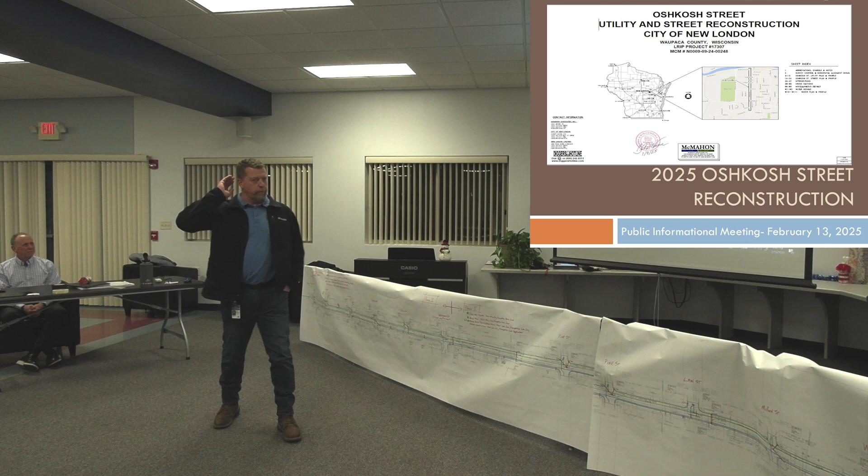Just see what happens. Okay, for the sake of time, it being 6:03, I'll start the meeting.

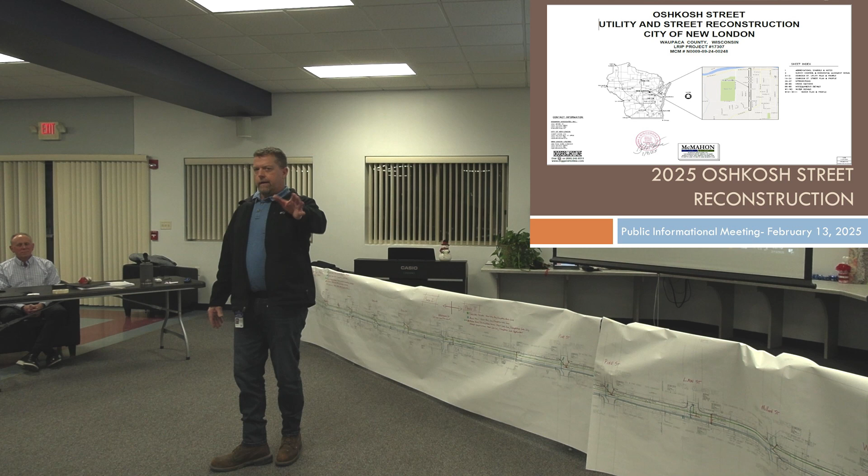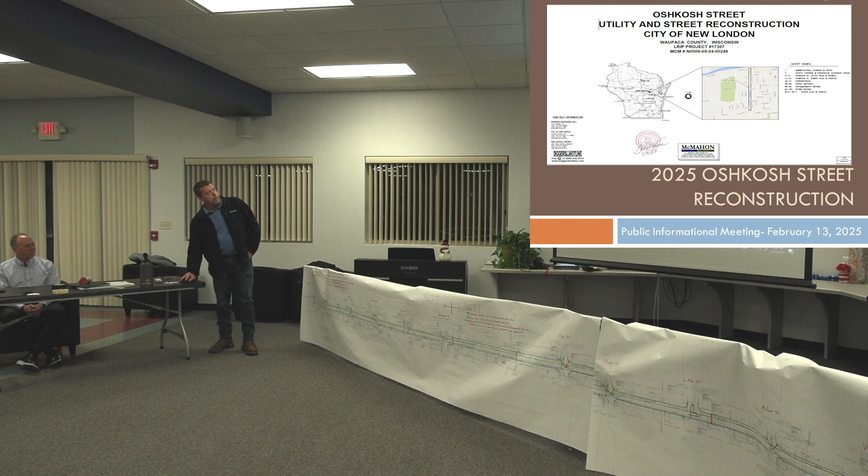All right, we'll start with introductions. I am Robert Garski, Director of Public Works for New London. I'm Brad Warner with McMahon, the project engineer, the consulting engineer the city's hired. I'm Mike Finch, water supervisor with New London Utilities, and we're doing this project jointly with the city. I'm John Hess, council president and District 2 alderman. Robert himself is district alderman.

So on the agenda today, we'll go over project summary, project timeline, detour routes and access to properties during construction, sanitary sewer lateral replacement, assessments and public hearing, water lateral replacements and assessments, mini storm and sump pumps, service walks, trees, garbage, and what's happening with the reconstruction street-wise.

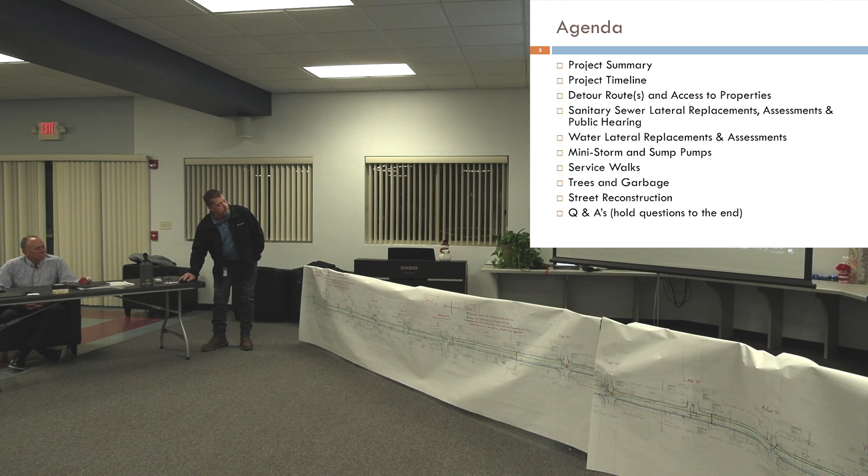So, project summary. We're replacing the sanitary main on Oshkosh Street from Wolf River Avenue to Pershing Street. The water main will be replaced from Wolf River to Jennings. The southern half has already been replaced. They have a little work to do up by Robin, but that's what they have for main.

Replacement of sanitary sewer laterals that are not to code, and replacement of water service laterals that are lead. There's also reconstruction of the storm sewer inlets, leads, and manhole structures. There will be an addition of a mini storm going in to pick up a lot of the sump pumps we have, especially on the southern end. That one will be more behind the curb versus a direct tap into the storm main.

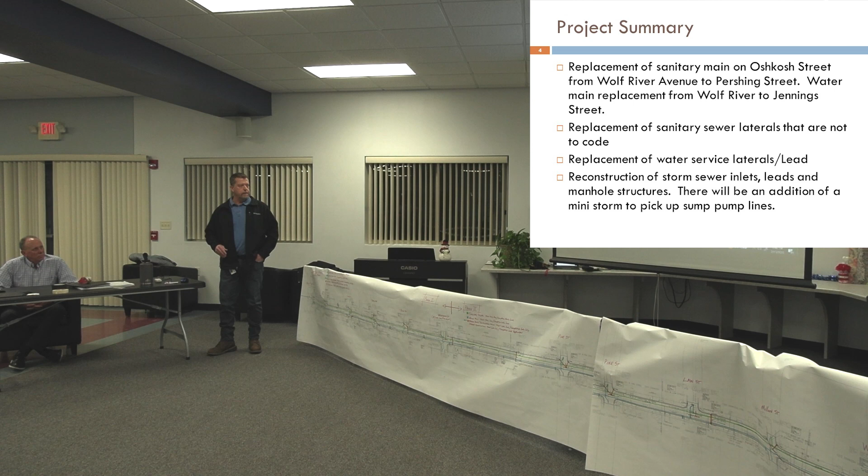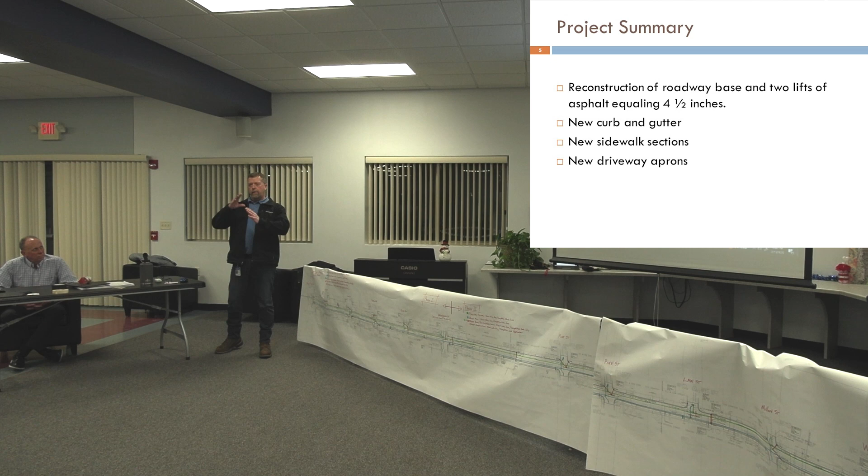There's also reconstruction of the road base and two lifts of asphalt equaling 4.5 inches upon completion, new curb and gutter, and new sidewalk sections. That doesn't mean new sidewalk is going in, only where there's sidewalk now will there be sidewalk replacement. There's no additional sidewalk being added. That's one that kind of got mixed up and I had a lot of calls on, so no additional sidewalk, just fixing what is out there now. There's also new driveway aprons for every driveway on Oshkosh Street.

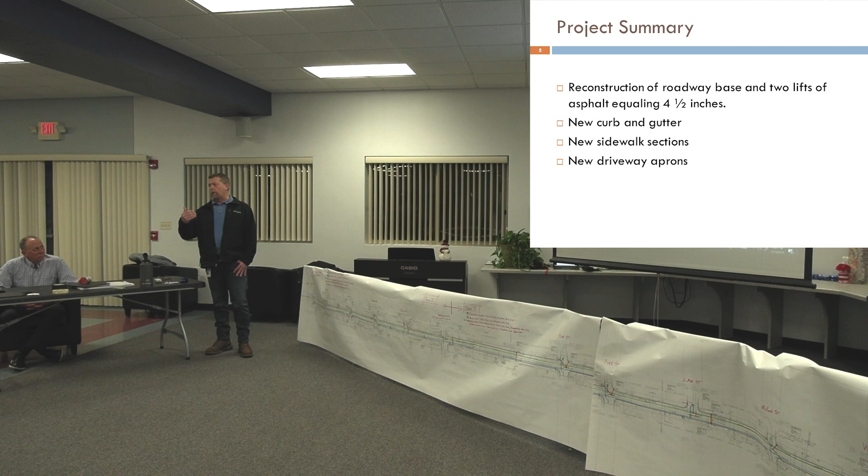Their projected timeline is starting anywhere from the beginning to middle of March. That's the schedule they've submitted right now, though of course weather can really play a factor in that. So they'll start with the sanitary main, bringing it all the way up to and stopping just short of Washington Street. Then they'll come back and do the water main, starting at Wolf River and carrying it up to that same stop point just before Washington Street.

We want to leave Washington open until school is out, that is the goal. So that's expected to go through probably mid-April. Then when they switch over to laterals, that will run probably until the first week of May timeframe.

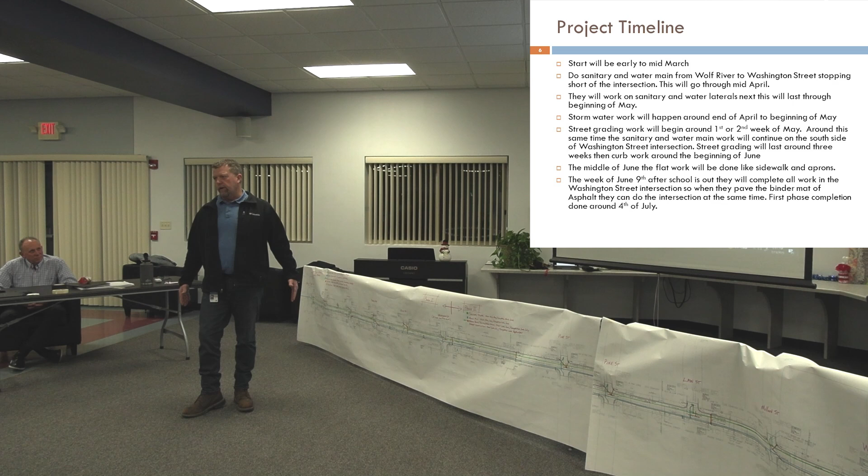This construction isn't a full blown up area, so it won't be like the whole road is inaccessible while they're doing that main work. It's more of staying in one trench, either cutting to define their dig area or milling that area to try to keep that contained and not have the street blowing up to where people are having trouble getting to their driveways.

So during that time, they'll be running that while this street work is being done down on this side in phase 1. They're hoping that after school, they can come back, do all the work in Washington, complete all the utility and stormwater, and that way they can continue with their curb and gutter and get that pretty much set and ready for asphalt.

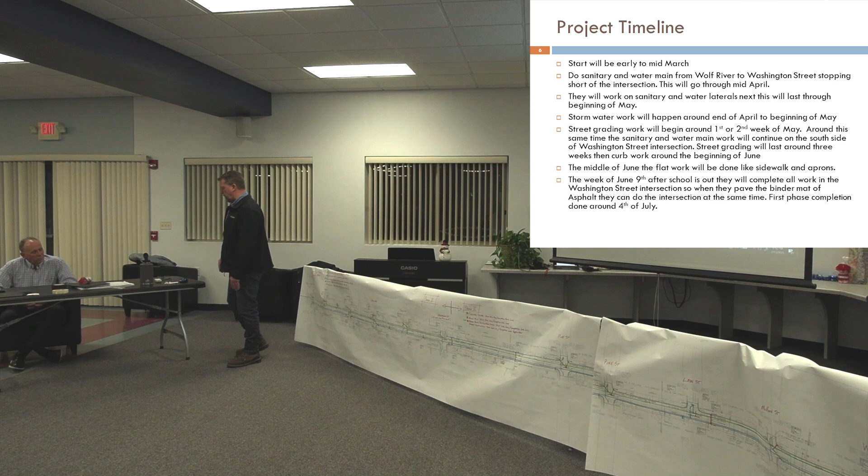So when they start with binder down here, they'll be able to pave that intersection in. So this phase 1, we're hoping will be complete-ish by 4th of July, around that time frame, according to their schedule, weather dependent.

Where are we at? Oh yeah, July. So they'll be doing, as soon as they're done running those 2 mains, they'll have a lateral crew in working. At the same time, they'll be working on the stormwater.

That's where this area, hopefully by then, phase 1 is done. We're on to phase 2. That's where you'll start to see these intersections blowing up like you saw in the first stage. So all the work will happen just like it did in the first phase. Hoping to have driveways and aprons worked on through August. Paving the second phase by September, middle of September.

If everything goes well and as planned and scheduled, which hardly ever happens with road construction, but if it does, we're looking at the beginning of October for completion of the project.

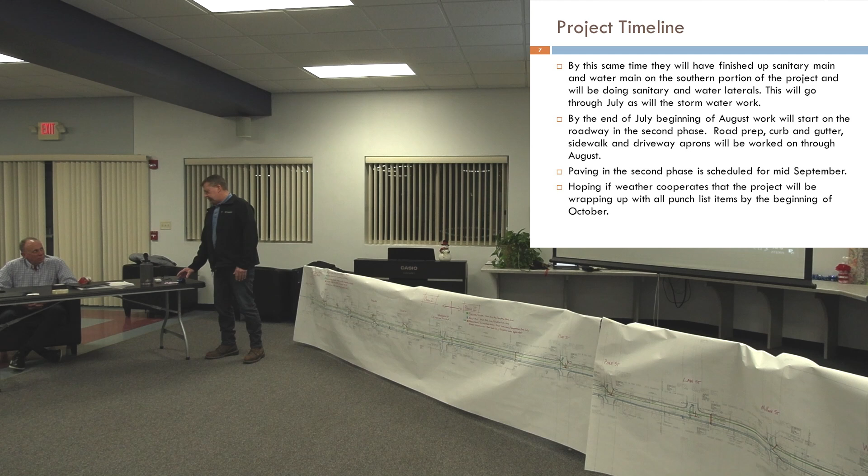Detours for the project: Oshkosh will be barricaded and signed to be closed to through traffic. This is for all your daily people that use that as a cut through to get through. It will be closed to through traffic. The main detour will be around from Pershing to Wyman to Wolf River, and reverse order for southbound traffic.

For residents, we're asking that, especially during any of that construction phase, you're utilizing the first side street as ingress and egress to your driveway, not using it as a travel lane. I realize some are close to the end or whatever, you have a block to go.

It's not like a police thing, it's just asking, because once the street starts getting worked up, there's a chance of dealing with dust and everything else if we have a dry year. So just trying to keep that in check too.

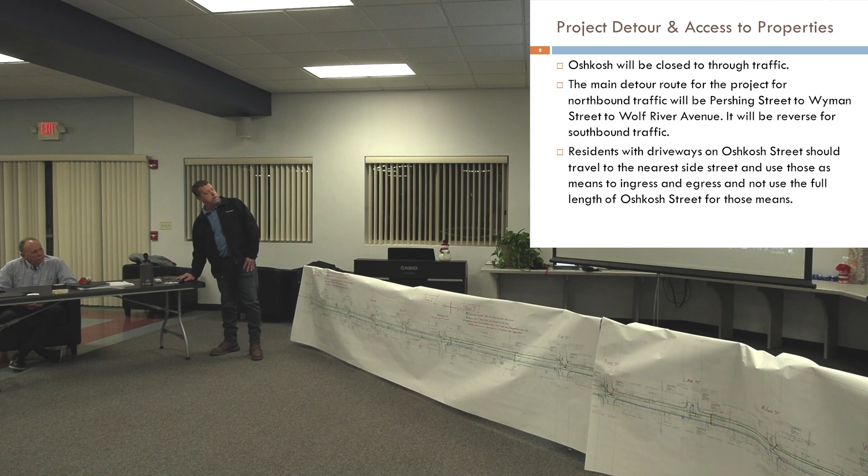Assessments. So for this project, there will be no assessments for any sidewalk work that is done, any curb and gutter that is placed, which is all brand new through the whole project. Sanitary and water main, there is no assessment for the mains. No assessment for the storm main, the inlets, the inlet leads.

No assessment for any mini storm that is put into the right-of-way line. Any of the roadway components, any of the fabric, the geogrid, the gravel, the asphalt, there is no assessment for that. And the driveway aprons - everyone will have a new concrete driveway apron that will not be assessed.

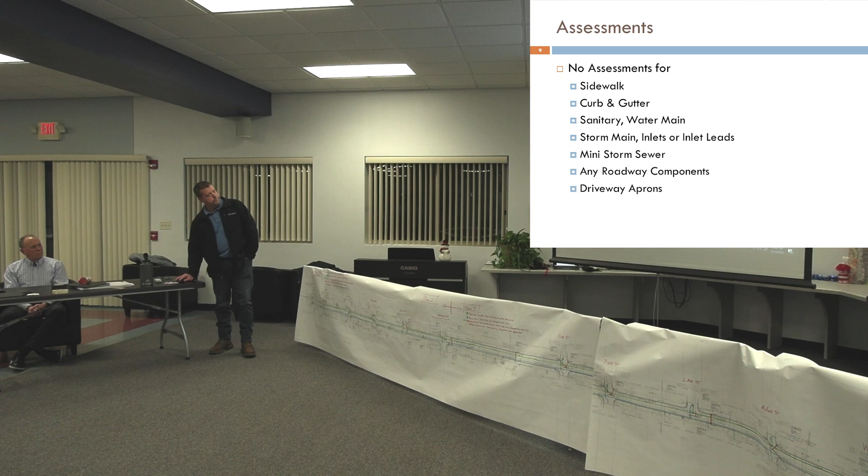Sanitary sewer laterals. During this project, the sanitary sewer main will be replaced on Oshkosh Street from Wolf River Avenue to Pershing Street. Per city ordinance 11.02m(1), all laterals connected to a new main must be compliant with current building codes or it must be replaced.

All of the sanitary sewer laterals along Oshkosh Street were televised, showing the condition of your lateral. Non-PVC laterals showed signs of cracking, joint failure, root intrusion, and water infiltration.

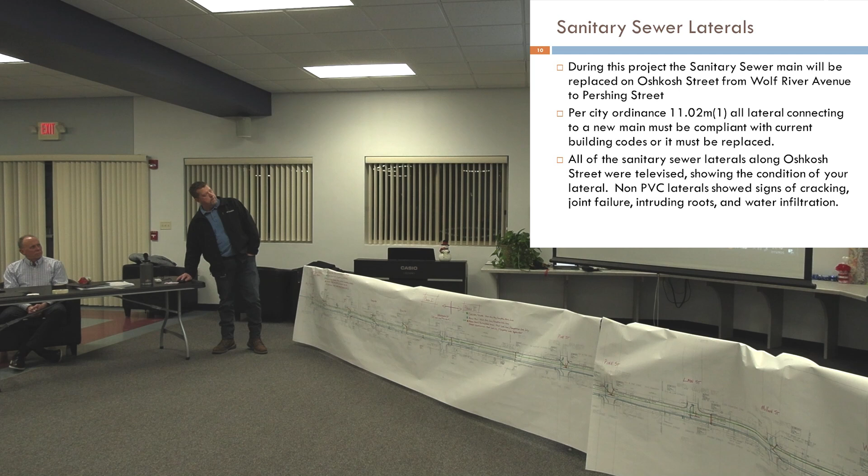Other reasons for this replacement, besides municipal code, is these sanitary laterals, once sealed, will keep all of this clean groundwater from entering the sanitary system and having to go through the treatment process, which every day gets more and more expensive, especially with the chemicals we have to use down at the plant.

It's also the fact that we're getting a $2 million grant to do all this road work, all this new curb and gutter, everything. We'd hate to have lateral issues or any type of utility issues down the road and have to cut up a brand new street that we're hoping lasts a very long time.

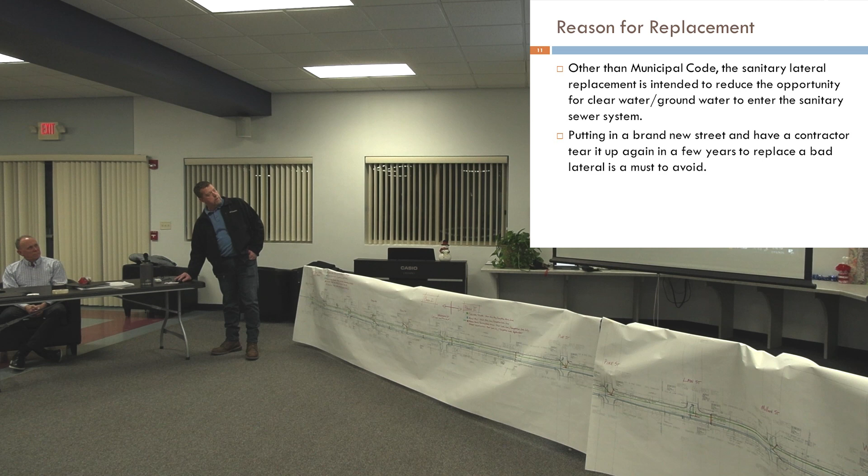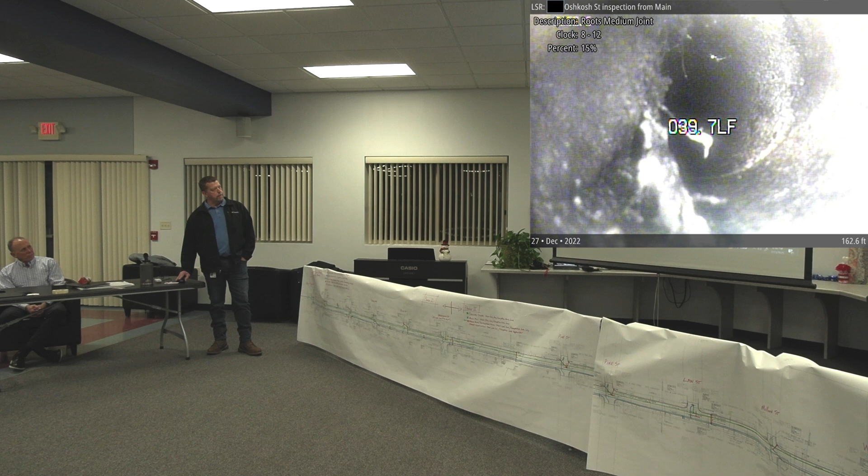Here are some clips that I took from some of the lateral inspections. You can see a leaking lateral and how the incrustations start forming from water intrusion. This is natural mineral deposits that happen over a long period of time from this clean water coming in. Here you're looking at a blockage of roots, a larger root coming in. This is on a concrete pipe.

So for sanitary sewer laterals, the city will be changing out all laterals in the road right-of-way that are not to code. Property owners will be assessed this cost. If we find that the lateral on your private property is compliant with current building codes, PVC pipe for example, no replacement will be needed. If the lateral is not compliant—clay, cracked, concrete pipe, any of that—it will need to be replaced.

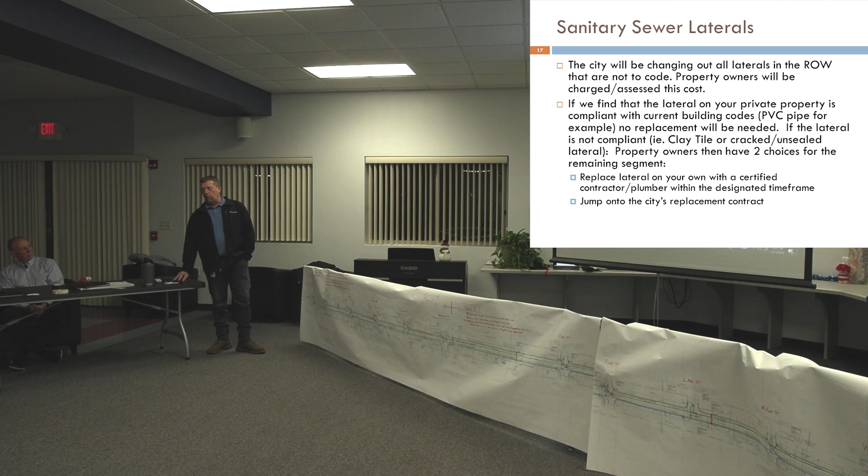If you choose to use the city contractor for the replacement of your lateral from your property line to your house, that cost, plus the cost of the right-of-way portion, will be charged to you. You can either pay that cost up front or pay the entire charge over time as an assessment.

10 years at 1%. The 10-year plan is proposed on the final assessment resolution. The final assessment resolution is a document that has to go through the Board of Public Works first, which it did, and now it will go to common council on the 19th.

I cannot say this is approved until the common council actually approves it. From past practice, this has never been turned down and it has always been offered, but I cannot tell you right now it's a guarantee until they do that, if they do that, on the 19th.

If you plan on hiring somebody else, that is the portion where I said you'd have to line it up, and you'd have that 60 days to make that repair to your private portion.

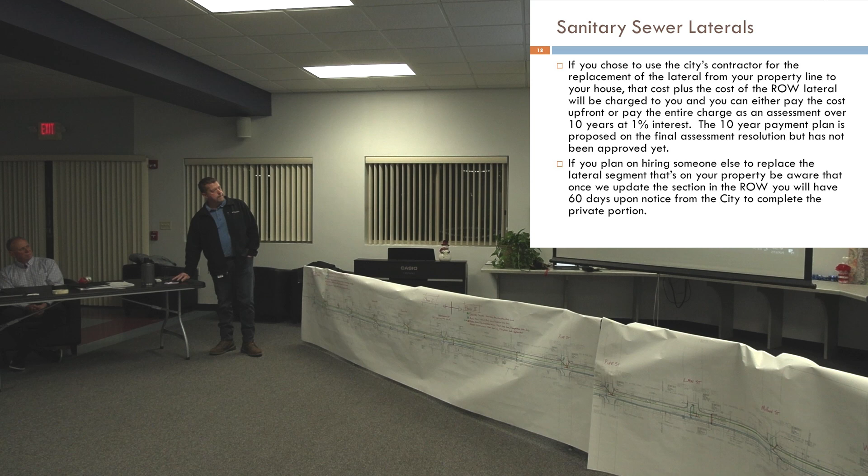Here's an illustration of the sanitary main, and the sanitary lateral that is within the right-of-way. If you have sidewalk, you can pretty much state that the back of sidewalk is close to the right-of-way line. If you do not have sidewalk, it is generally anywhere from 11 to 13 feet from back of curb in towards the property. Segment 2 would be from that right-of-way line to your house.

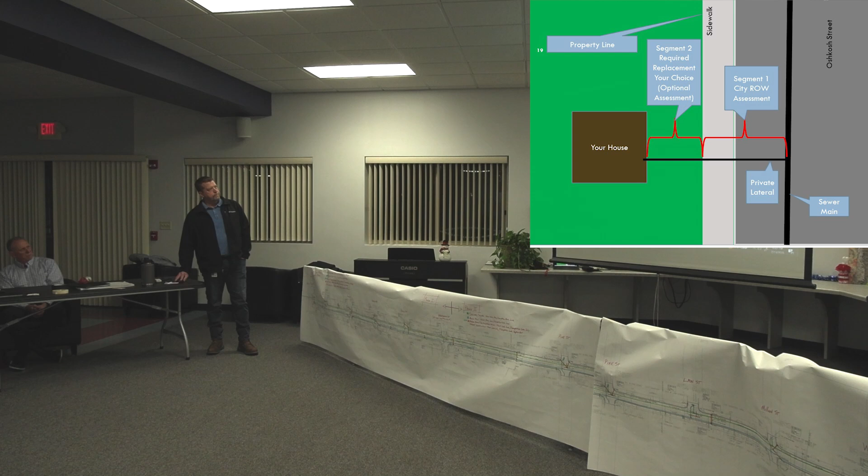Engineer's report. We have a bid price from the contractor, so we know we have an estimated cost only. Page 4 talks about the right-of-way lateral versus the private portion of the lateral, kind of like I illustrated in that last slide.

The engineer's report on page 5 talks about right-of-way costs. The estimated sanitary lateral assessment for lateral work in the city right-of-way or easement. The cost includes all construction, administrative, legal, engineering, and contingency costs required to provide a new lateral to the right-of-way line or easement line in conformance with the City of New London standards. The cost shown is an estimate for a new 4-inch lateral excavated to the right-of-way. The final assessment shall be equal to or lower than the amount shown in bold: 6,418.

The reason why we did the open trench method in the right-of-way is because this is the most expensive form of getting your lateral replaced. And you're saying, what? Why are you doing the most expensive way?

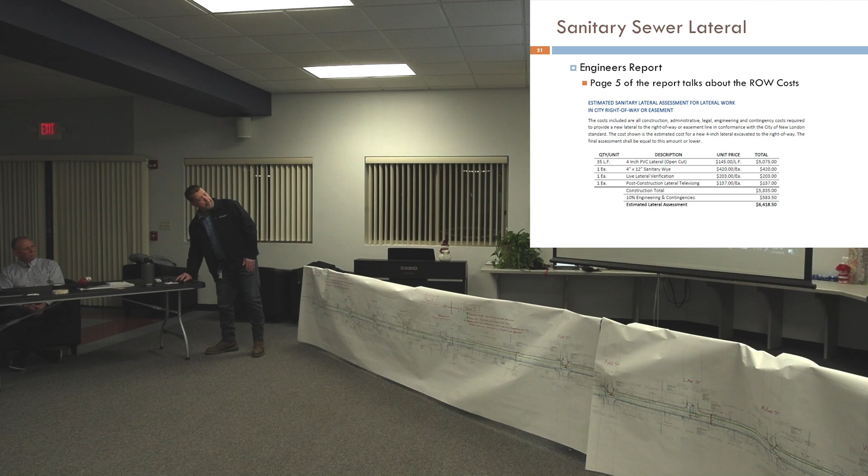Private side — so there are three methods. We have the lining method. This would be from your right-of-way line into your house. There's a setup charge for that lining.

The 4-inch cleanout is placed at the right-of-way so they can go in with their equipment, clean your existing lateral, and then bring in the liner through that same cleanout. They expand it, it cures in place, and there's very little work to be done inside. That cost is estimated for a 30-foot piece, and everybody's private side varies based on the setback of your home from the right-of-way line. Over a 30-foot run it's $3,265, based on bid prices we got from the contractor.

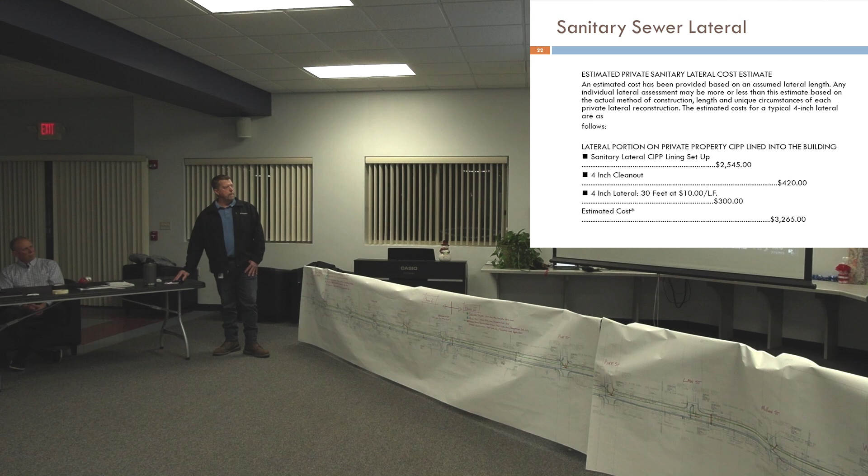There's also pipe bursting. With pipe bursting, they actually pull a line through your existing line. They have to make a cut in your basement floor, or if you have a crawl space with access to it, there wouldn't be any cutting there. They bring a cable through and are able to pull that new line all the way into your basement and make the connections. Everything listed there is pretty much everything they need to do to complete the job for a 30-foot run, and that price came in at $3,898.

There's also the excavating method. This is where they trench right up to your house from the right-of-way line. In some instances you're not able to do this, simply because some houses have the lateral going under the driveway or the apron, at an angle where you'd be taking out a lot, or there might be a front porch that would conflict with it.

And if you notice, pavement restoration beyond what we do for cutbacks to put in the road is not a covered item when it comes to excavating a lateral through a driveway. Neither is decorative curbing, landscaping, stone, or anything like that. If it's not moved by you and clear of the way, that's something you won't be able to put back, because the contractor is not going to move it aside to do the work — it's not a covered cost.

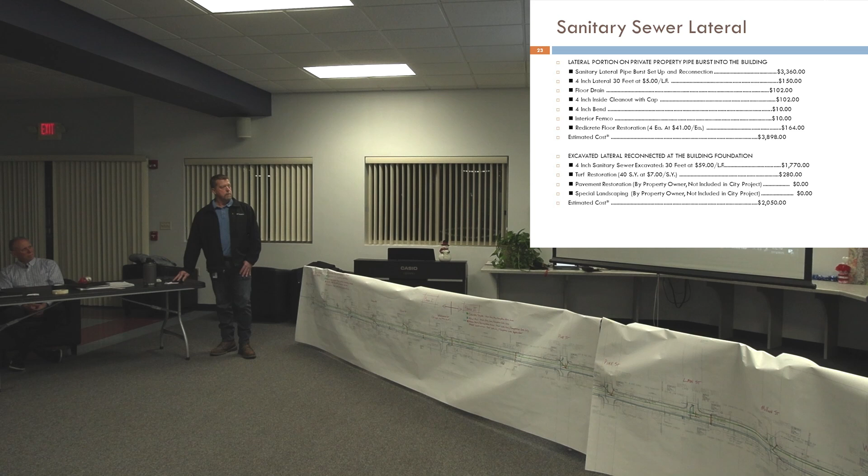So this is pretty much everything I went through, the methods. Open trench: cut, lay the pipe. You'll need to clear out anything in the way. You might lose trees if they're in the way. If you have trees in the front, cutting roots will more than likely damage those trees. Contractor will fill in the trench, but like I said, more than likely it will settle. Trenchless pipe bursting: pull a new pipe through the old one, then cut and patch the hole in your floor around the new pipe that's installed.

The lining: they add a clean out at the right of way, run a camera down to identify the length they need, clean your lateral, cut their liner to length, bring it in, blow it up, and it cures in place. It's just like an internal PVC pipe.

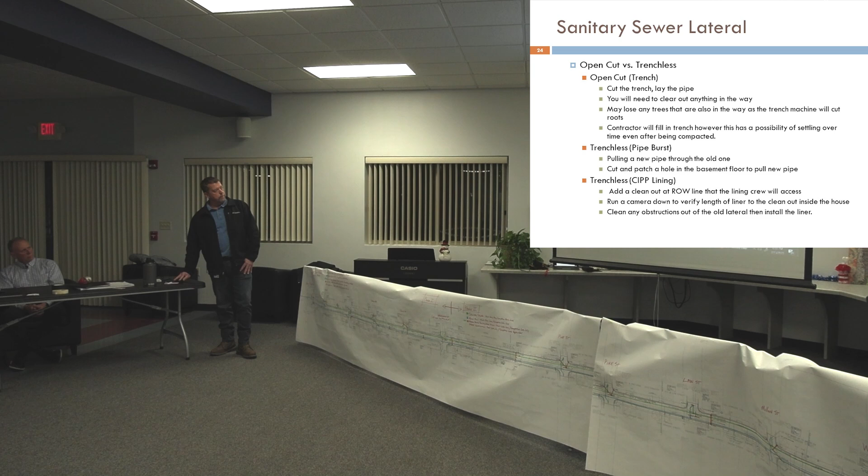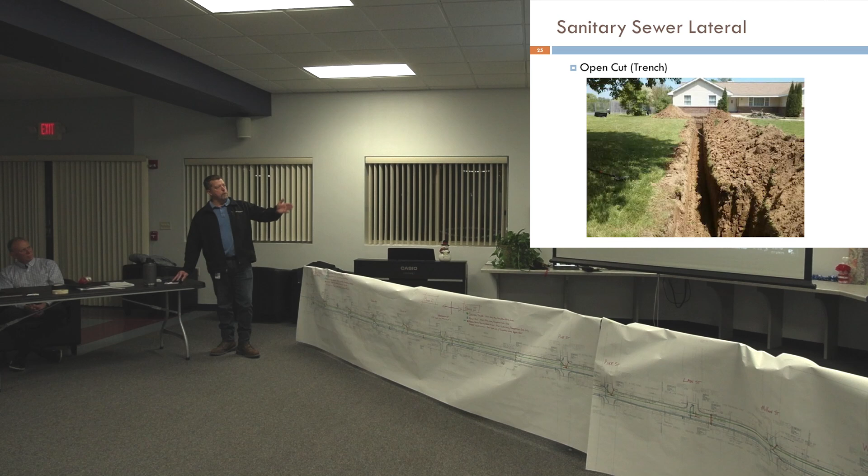Here's an example of an open trench method. This is a very clean one and not very deep, but that gives you the point of view of what you'd be looking at as far as an open trench.

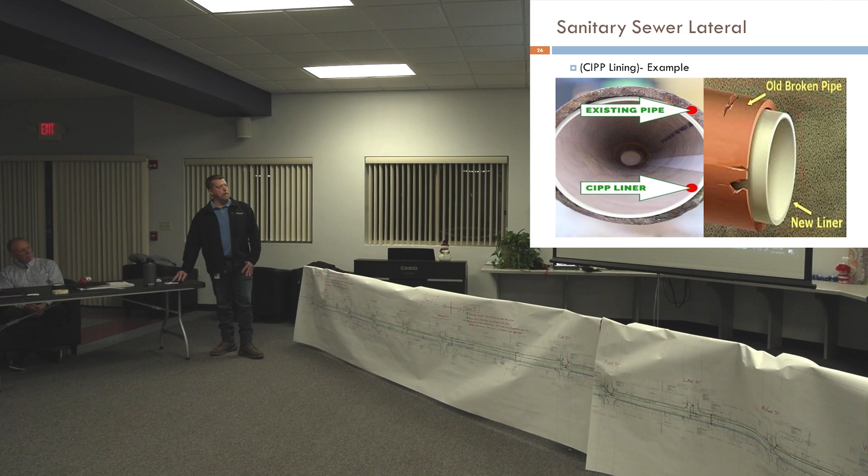Here's an example of the liner. So they bring it in, blow it up, it cures in place. It's just like a PVC pipe within your old pipe or lateral.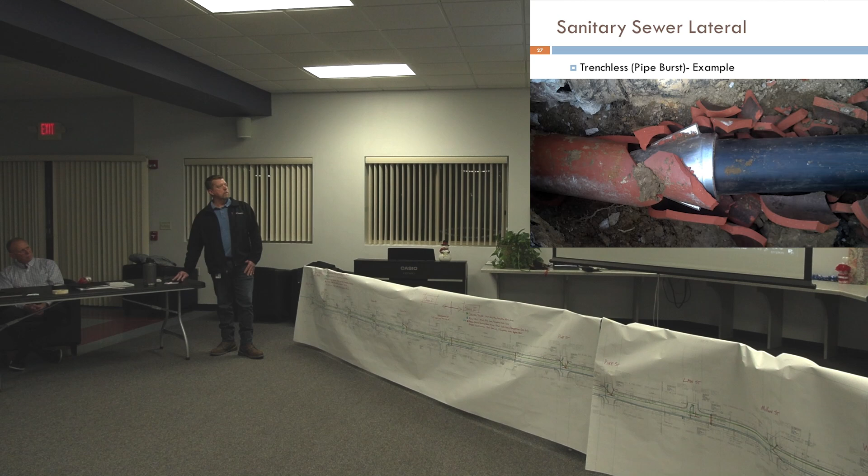If you want the city's contractor to do the work on your private side, the waiver on the back must be filled out and returned to me down at the municipal building. You come into the Public Works Department, we have a notary there, and also our clerk Nicole is a notary. So you come in, sign it, and you'll be entered into the spreadsheet noting that your lateral would be replaced by the contractor.

Once the project is complete, that summary of everything that is done - I'll actually be sending a letter to everyone that will be assessed. It'll explain the payment plan if approved and when your first payment would be due. More than likely, being that this is finishing up in October or November, don't want to jinx it, it would be due by January 31st of 2026.

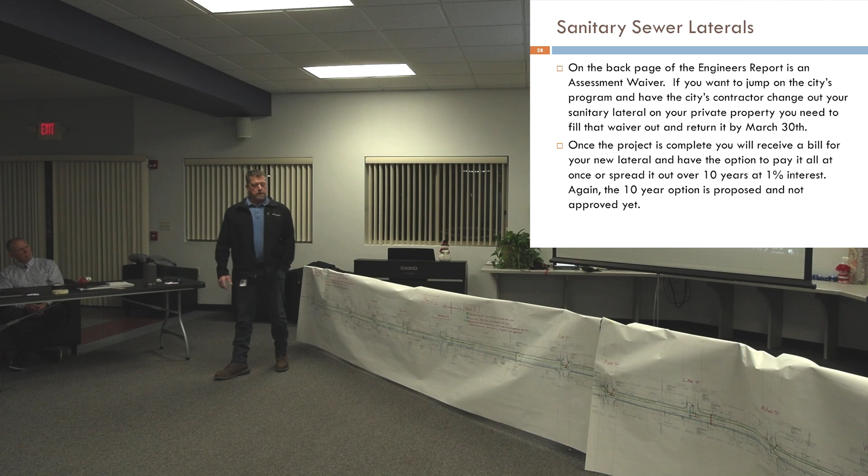It always has to go, the assessment portion by law always has to go on the first portion of the tax payment. If anybody is opposed, I cannot change anything. I am delivering you what municipal code and ordinance states for this project. You will have a chance to be heard at the public hearing on Wednesday, February 19th at 6:30 during the Common Council meeting at the Municipal Building.

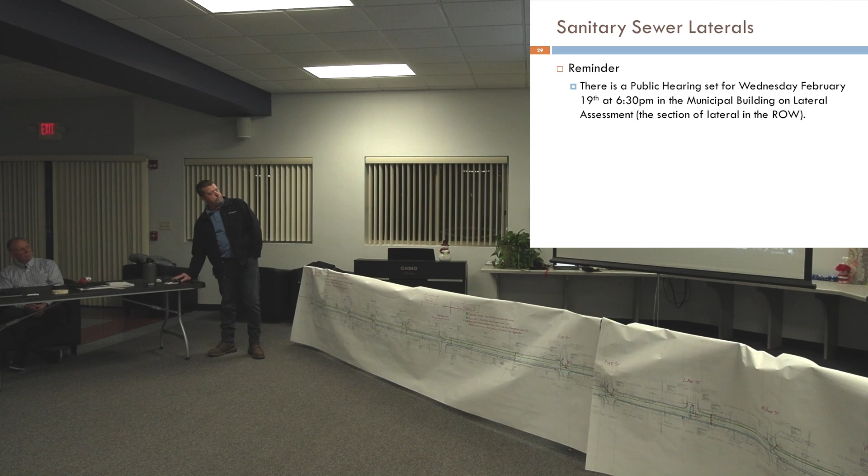Mike, do you want to touch on? Sure, I had Jason, he couldn't make it. We had trouble connecting today, so I just scrambled. I've been out of town for 2 days and super busy today, but I'm Mike with the water department. I've been here about 30 years. I've probably been in all your homes changing your meters and whatnot, but we're piggybacking with the city.

I'm not sure, do I have to have a separate form signed for the water line? No. Because the assessment goes through. So most projects we've ever done, we haven't really done jointly with the city, so we don't get the opportunity to give you an option to get financed through the city for the replacement of our laterals. You would just have to pay when those were done.

So this is a great thing for you guys because the DNR is actually making us get rid of all the lead services. I'm sure everybody's hearing this in town because it's a big thing going on. Last year we dug 60 lead services in town. This year we're digging 50 more, and we have to have them all gone within about 10 years, but we're being hugely proactive. Our city ordinance says immediately upon seeing a lead service, it has to be replaced.

So the people that we're digging up right now do not have an opportunity to get financing like you guys do, over 10 years, to get your services replaced. So that's a great thing for you guys, should you choose that option.

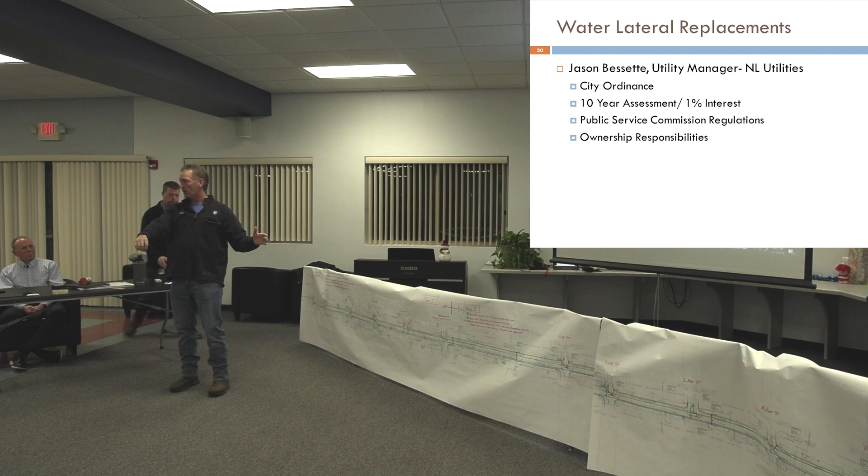Let me back up a little bit. The water line is different than the sewer line. The utility owns from the water main to the shutoff in your yard, which is called a curb stop, and you might see us turning that. There you go, all right. So we own all that.

We are replacing every service on the whole street, even up by Jennings Street where we put the new water main in a few years back. If anybody lives between Jennings and Pershing, we put a brand new water main in there, but we did not run new service laterals to the property lines because we weren't doing a joint project, and we were only tearing up as little of the road as we could, so we were able to hook onto your copper service. Now we're going to replace all those because the whole road's torn up, so why wouldn't we at least do that with the hope of not having any leaks?

So if you do have a copper service, you are allowed to keep it, and you only own from the curb stop to the house. If you have lead or galvanized, it's automatic that it has to go, but if you have a copper service, you could request to have a poly service, because that's what we'll have, which is plastic.

So I would hate to tell you that copper is 100% fail-proof, because some of this stuff is from the 1960s through currently, while we've been doing poly for about 10 or 15 years now. But just because you have a copper service doesn't mean it couldn't leak in the future.

So some of these jobs, if they're doing the pipe bursting, they're going to pull the sewer through, but they could pull a brand new water line right with that, and it's an inexpensive way to get a new service compared to digging to the house and such. So if you do want a new service no matter what, since they're pulling the sewer in, you could get a new plastic service run to your house, and obviously you have to pay for that. But then all your utilities are upgraded and your worries are pretty small of having problems in the future.

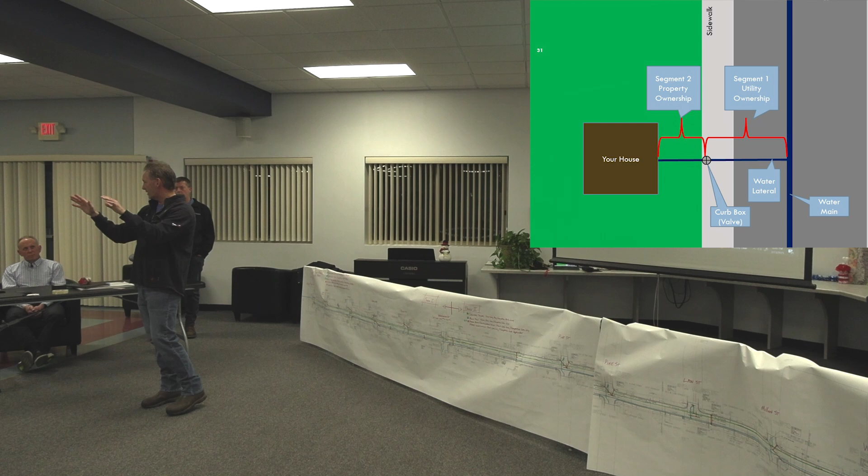So we have had copper services get pinholes in them. It's not real common. In Greenville, the whole town had problems with this, and they had leaks everywhere. It's got to do with soil conditions. We have not had any problems on Oshkosh Street, but that doesn't mean we couldn't have five in two years because they're old, and all of a sudden it starts happening. I'm just telling you that so you're aware, but you do not have to worry — generally they're pretty structurally sound. I'm not trying to scare you, just trying to let you know what your options are.

So I hope that's about all I need to cover there, sir. All right, we'll talk about questions later if you have those.

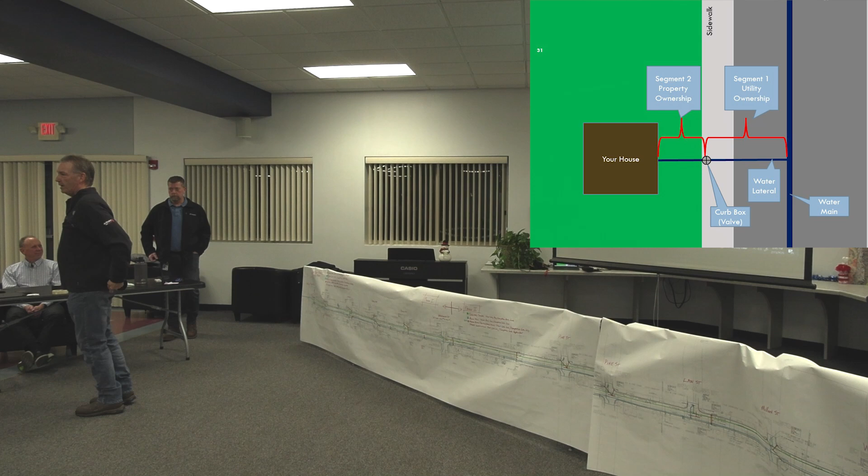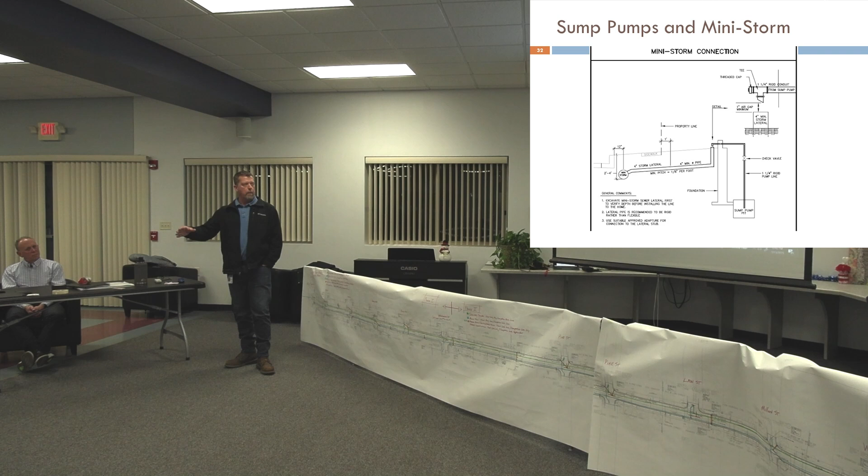So with all this work going on, homeowners may experience increased running of their sump pumps after the lateral work is complete.

What I talked about earlier about tightening up everything and keeping clear water out of the treatment plant, sometimes when you're tightening up all these lines, the groundwater that always seeped in over the years is now sitting there looking for a place to go. If a resident does not have a sump pump, they may experience water on their basement floors, as many older homes commonly had their drain tile connected directly or indirectly to their sanitary line, which is a plumbing code violation.

I'm putting this on there. I don't know through televising if any of them are this way, but there could be some in that older section set up like this. Once you have that interior portion replaced all the way out to the right-of-way line, that'll tighten up a lot of things and not allow groundwater to enter the sanitary system.

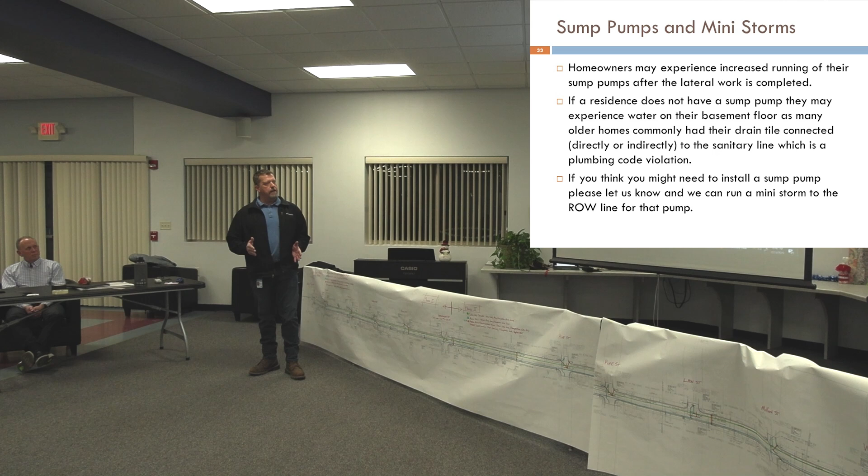If you think you might be in that situation and down the road you think you'll put in a sump pump to alleviate it, please let us know as soon as possible. We will supply a mini storm to your property line in anticipation of this sump pump being put in, because once this project is in, running water from a sump pump to the street will no longer be allowed.

You have to either run it in your front yard, or like a lot of these that are coming through the curb will be hooked up in the construction process.

Homes that have a sump pump discharge hose will receive a 4-inch diameter Schedule 40 PVC mini storm lateral that extends to the right-of-way. The typical depth of this is going to be 3 foot.

Homes that have buried sump pump lines right now that discharge through a curb head will receive a 4-inch diameter Schedule 40 storm lateral extended to the right-of-way at that 3 foot depth. It will then have a riser that will come up and meet that line at whatever depth or grade it's at right now.

If you had trouble with it freezing in the past because of how shallow it is, it would be the time to bury it down below frost line, or down at that normal frost depth, and hook up that way.

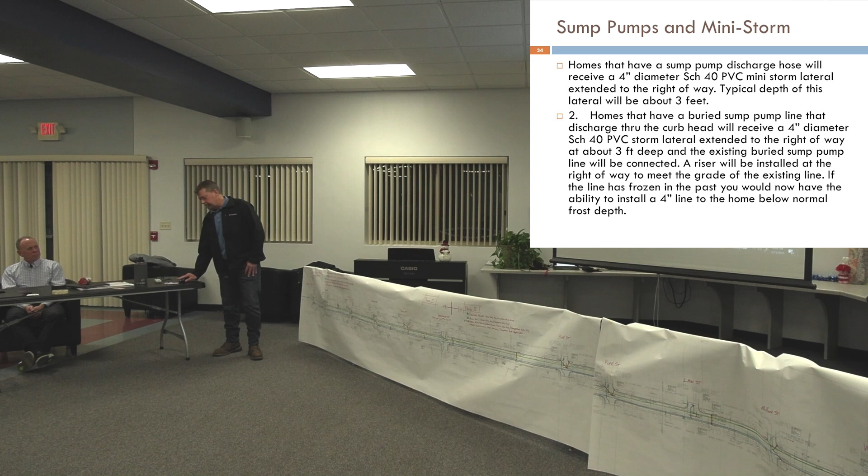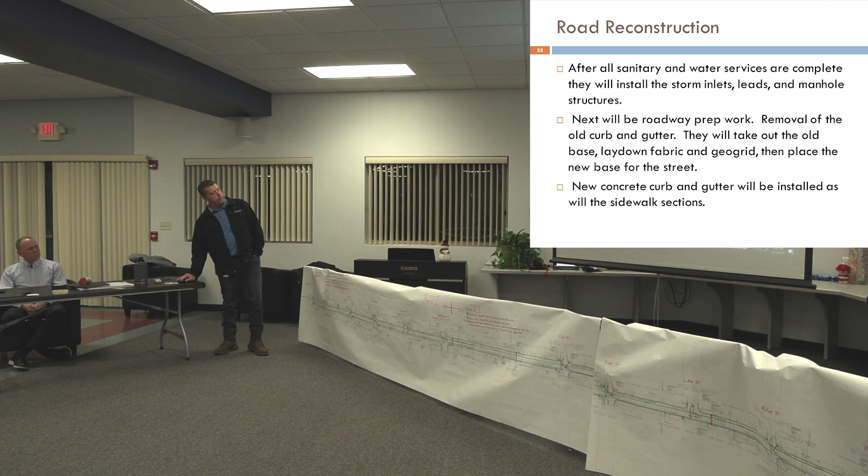Road construction. I pretty much went over a lot of this as I was talking about schedule. After all the utility work's done, storm inlets, leads, manhole structures, roadway prep, removal of old curb and gutter, they're taking out the base, laying down the fabric geogrid, placing the new base, which will be a foot thick, and then they'll install the concrete curb and gutter.

Your driveway aprons will be poured, backfilling behind the curb, topsoil will be placed, and a 2 3/4 inch asphalt binder mat will be placed down for the road surface.

Right now I am hoping that we can wait for the surface mat until 2026. Everybody's saying to me, why would you want to do that? We're going to have all these manholes ramped, you're going to have lips at the driveways of 1 3/4 inches.

But there is so much utility work at such a depth, even with the fabric and geogrid, the right thing to do would be to try to hold off, asphalt ramp these structures, which there will be a lot less of, ramped at the butt joints of all the intersections that it meets, and come back and surface it before the 4th of July of 2026.

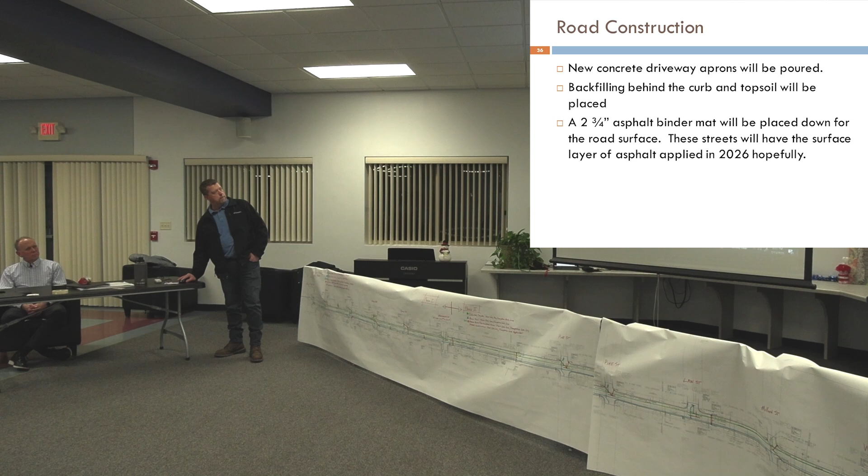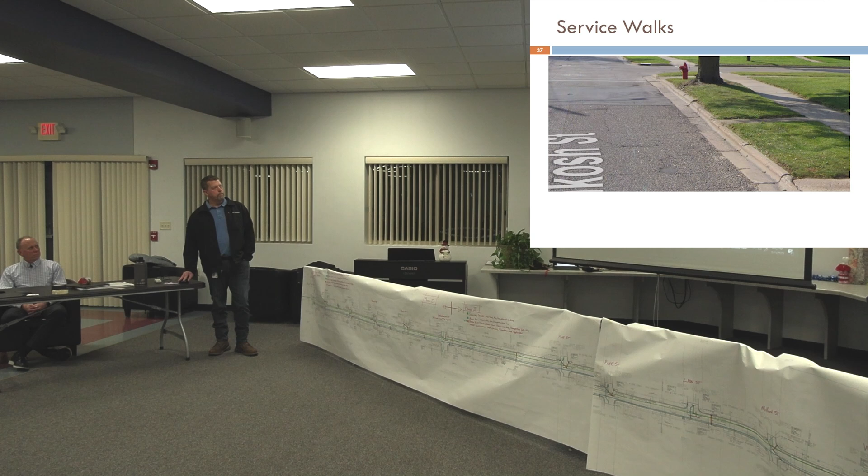Terrace trees. Some have already been removed by NLU to move their electrical lines and poles. Any terrace tree, for the most part, will be taken down. A lot of them that are left there that weren't ash and already taken down are maple.

Extremely destructive to curb and gutter, to sidewalk, and to the road surface because of the way their root base goes. That root base gets under that asphalt and wreaks havoc on it. So those will be taken down. I hope to have these trees marked by next week.

We are currently putting together a packet for anyone who wants a terrace tree. There will be a handout for you, and there will be a selection process of which trees to choose from. You'll be able to pick, and it will be planted in your terrace.

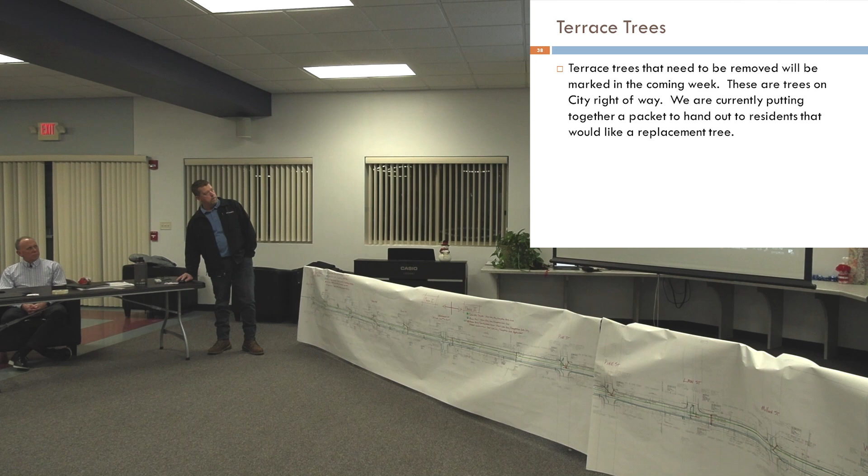Garbage. The goal is to keep the garbage collection at your driveway entrance. I'm planning on having them come as early as possible so they're not in the way of the construction crews.

There might be a time when this changes, and you will be notified. That's why it's important to have your information down if you haven't already. I'll be reaching out if it changes, by method of what is going on in your section. But the hope is that you'll have collection for the most part in front of your house on your normal collection day.

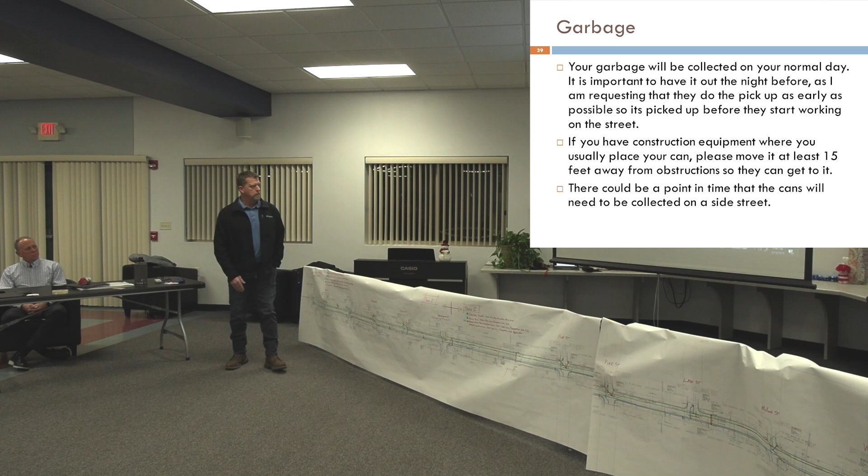Now it's time for questions.